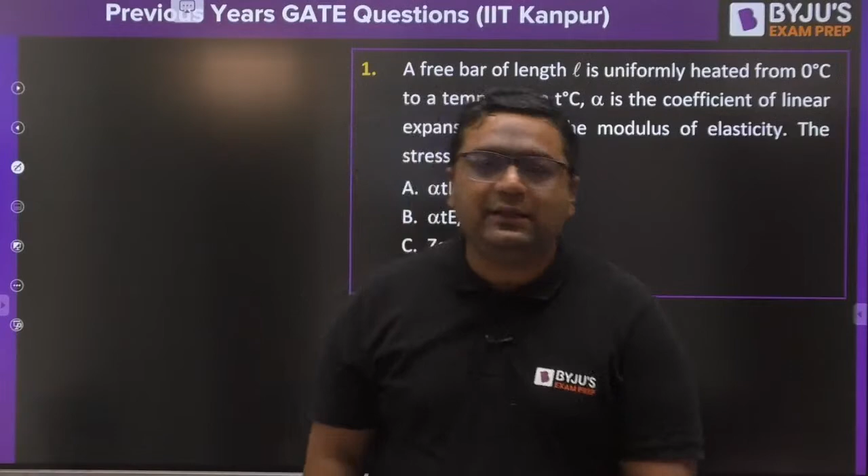This is your first question. I have not mentioned the years, but I have taken all the questions from those 5 years from engineering mechanics and strength of material. So guys, let us see the question. This year IIT Kanpur is going to conduct the GATE examination, so that's why we have taken those years' questions. So guys, this is the first question.

A free bar of length L is uniformly heated from 0 degrees Celsius to a temperature T degrees Celsius. Alpha is the coefficient of linear expansion, E is the Young's modulus of elasticity. The stress in the bar is? You need to answer this question.

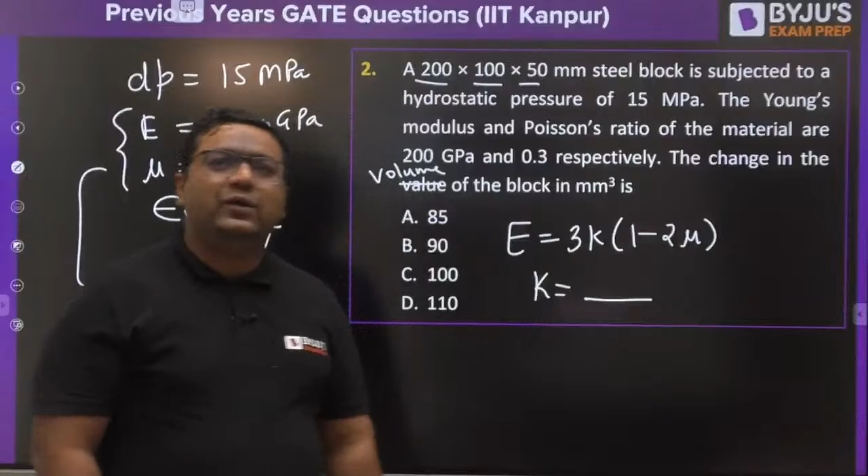Very good, guys. So I feel many students have given the answer. Sai Krishna is also saying B. And yes, B is the correct answer.

Can you tell me what would be the value of K using this relation? Very good, Sushil. Can you tell me what is the value of K? Because E is 200, which equals 3 times of K into 1 minus 0.6. What are you getting as K?

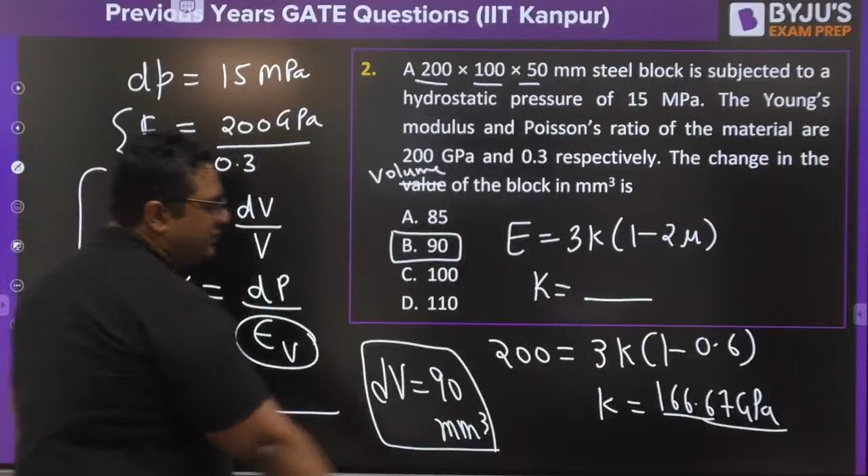Then finding out this K, you will put it here and get the volumetric strain. Then you will get the change of volume dV as 90 mm cube. Very good, guys. Malesh, wonderful dear. So Sagnik has given the value of K as 166.67, and yes, it is correct. This would be coming in GPa. Because this is in GPa, so that would also be in GPa. Wonderful, let us move further, guys.

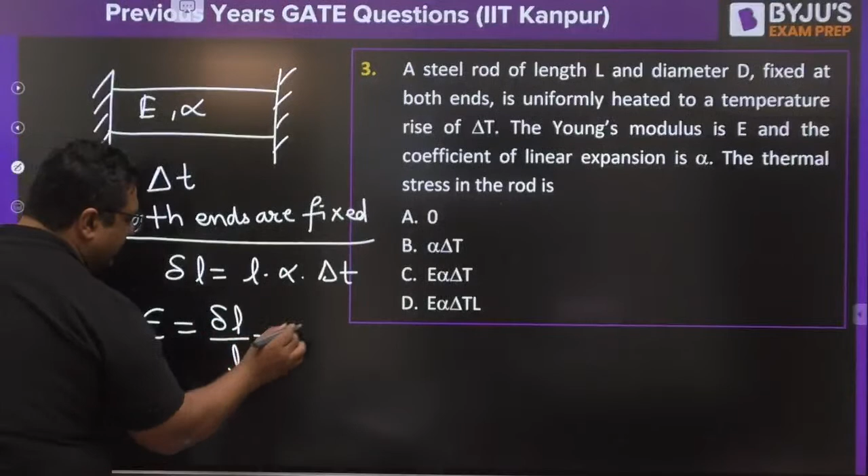Sagnik has said C, Teju has said C. Yes, so guys, this is a both-ends-fixed case. When both ends are fixed, you can see E is Young's modulus, alpha is the coefficient of thermal expansion, and delta T is the change of temperature. So for this case, first of all, delta L is defined as L alpha delta T. Then you can define the strain as delta L by L, which is nothing but alpha delta T. Then we define stress as E times epsilon, that will be E alpha delta T. So the answer is C. Wonderful, guys.

This is the next question, guys, question number 4. This is a stepped steel shaft shown in the figure, subjected to a torque of 10 Newton meter. If the modulus of rigidity is 80 GPa, the strain energy of the shaft is? Very good Mangu, very good Hazik Imam, Sushil, Parth, Malesh.

Kishan, don't worry. For that, I have taken the practice session separately. If you remember, last month I took a complete marathon on SOM and TOM, other than gate questions. You can see the level of those questions, and I feel you found it good also. So guys, don't worry, for those kind of marathons I am going to come now every week.

I was waiting till your subject gets completed. Now you will be getting that level of question also in the marathon. But previous year's gate questions are also required. If you are talking about previous years, questions are very good. Just for 3-4 years they are easier. So sometimes easier, sometimes difficult they have been.

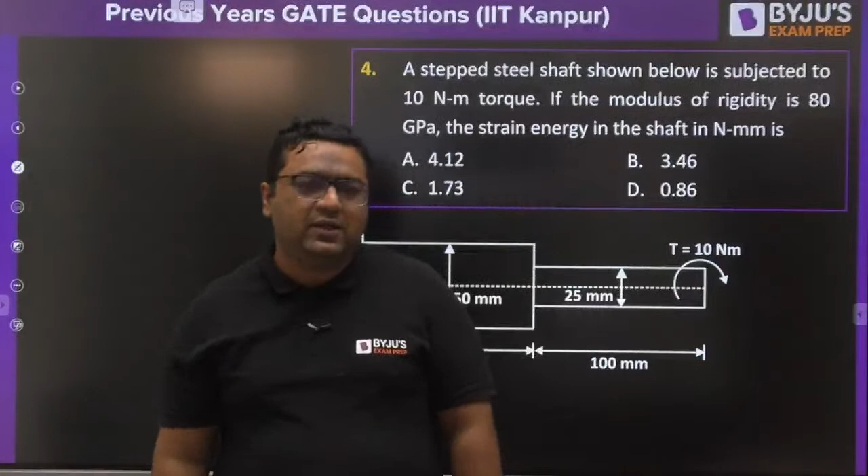In this session only, you will see 8 to 10 very dangerous questions also. But yes, that practice session where I was taking every question as dangerous, that will be coming next week. So we are going alternatively, one week previous years, one week practice session. So be ready for that.

Solve this question, guys. Like this question, they are asking strain energy. You can assume this to be shaft 1 and this to be shaft 2. And you know that strain energy is a scalar quantity, directly added up. So you will be saying U is going to be U1 plus U2.

You also know that U1 will be defined as half into T1 into theta 1. And you know theta 1 is given as T1 L1 by G1 J1. So you can write U1 as T1 square L1 by 2 G1 J1, and U2 as T2 square L2 by 2 G2 J2.

Now my dear, you can see diameters are given. J is defined as J1 is pi by 32 - pi by 32 or 64? Yes, it is 32. So pi by 32 D1 to the power 4, and J2 will be pi by 32 D2 to the power 4. You can see D1 is 50, D2 is 25.

Lengths are given as equal, and as the torque is applied at the free end, using method of section you will find out both T1 and T2 are equal, and they are equal to 10 Newton meter.

Any doubt, please ask, guys. Very good Mangu, but I need the answer. Like Sagnik has said, the answer is C for this. Let us see - okay, very good. What about others? Okay Mangu, very good, you have given the answer also. Very good, wonderful dear.

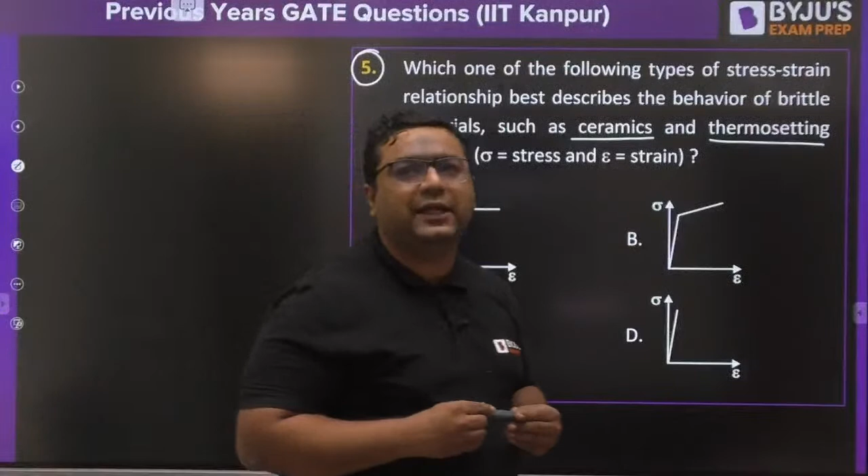So all of you are saying the answer to be D, and that is correct. The reason behind this, guys, is that in this session, whenever you follow a previous year's book, you get a solution, but the solution you get in this session is more authentic, so you'll get the correct explanation for everything.

When we say a material is brittle, it means brittle materials have less or zero plastic strain, because brittle means not ductile. Ductility means plasticity, and you can see this region is plastic, this complete region is plastic, this region is plastic. So only this diagram has no plasticity, which is why D is the correct answer.

Question number 6, a numerical answer type problem. A rod is subjected to a uniaxial load within the linear elastic limit. The change in stress, D sigma, is 200 MPa, the change in strain is 0.001, and Poisson's ratio is 0.3. You need to find the modulus of rigidity. This question is from elastic constants.

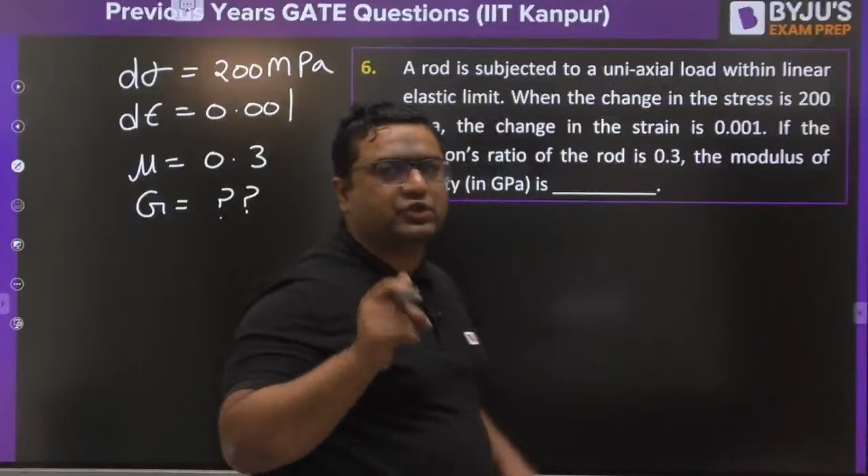This is a pure elastic constant problem. You know that Young's modulus is defined as D sigma by D epsilon, and this relates mu and G through E equals 2G times 1 plus mu. You need to find G, so solve it.

I feel Sagnik has given the answer 76.92. What about others?

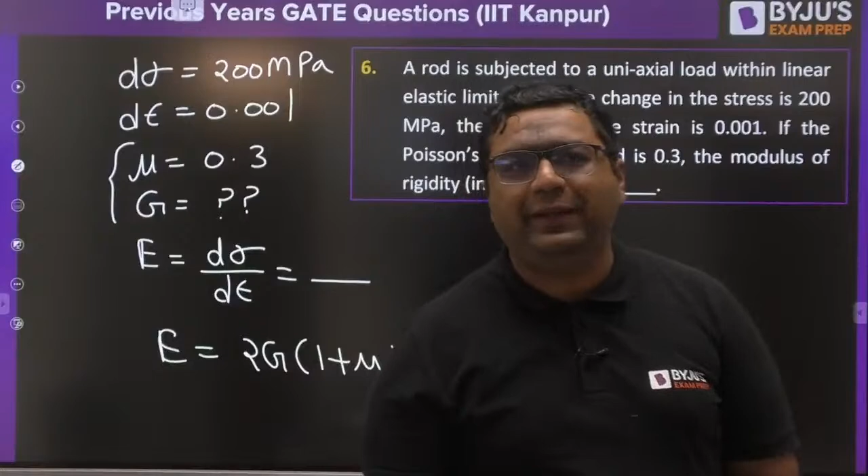It is 200 by 0.001, which comes out to be 200 GPa. So 200 equals 2G times 1 plus 0.3, and you get G to be 76.923. So all of you giving this answer are correct.

Abhishek, good morning dear. Yes guys, wonderful. Teju, very good. Anil, very good. Kishan, very good. Wonderful guys.

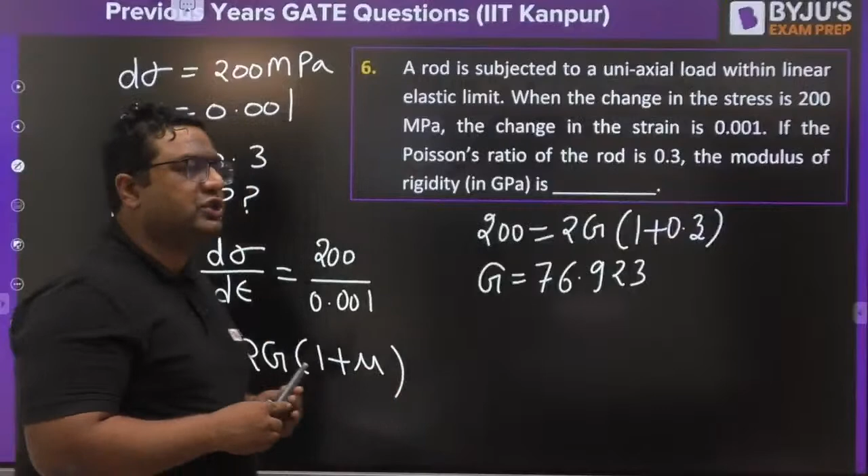So guys, this was question number 6. Now let us move to question number 7, a basic conceptual question for 1 mark. For a simply supported beam on two end supports, is the bending moment maximum at the support, always at midspan, where there is no shear force, or where deflection is maximum? So bending moment is maximum where?

Dear Abhishek, when they give it this way, you must understand that when you have a stress-strain diagram, and you need to take the slope, you can take this relation: sigma 2, sigma 1, epsilon 1, epsilon 2. This is a mathematical slope relation, so don't worry about that - that kind of thing can be given.

This question, many students are giving different answers. When they say there is a simply supported beam, bending moment is maximum where? At the support there is no chance. Some students may say B, some may say C, but it is not always at midspan. You must have seen a case with UVL instead of UDL - in case of UVL, the maximum bending moment is not at midspan, only in case of UDL do you get it there. So if the loading changes, you cannot guarantee maximum bending moment is always at midspan.

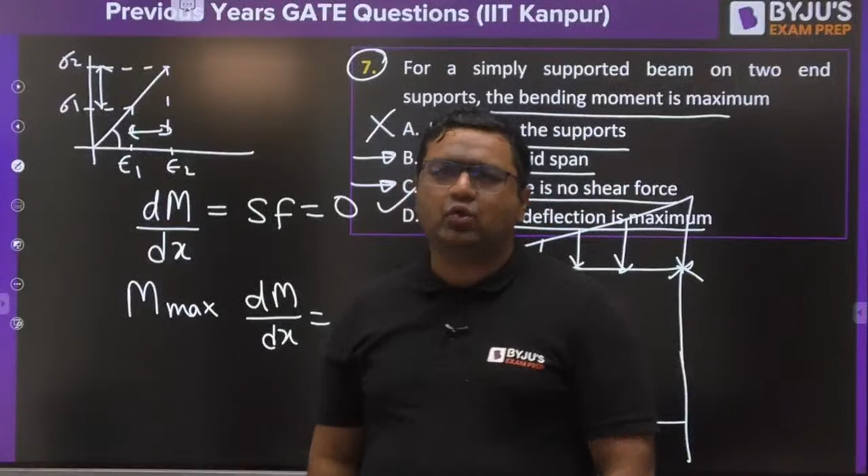Is it clear? Ram Yadav, in all the top 7 IITs, design is at top, thermal is majorly at second number, third is manufacturing. So that is a good idea. I don't know other than this what you are getting, but if you are getting the best option it's fine, though if you are getting IIT Bombay or IIT Chennai, those are better. Let us move to the next.

So guys, here a force is acting, and let me show you the force for this case - a 100 Newton force is acting here.

Yes, you need to answer about the maximum bending moment for this case. So my dear, for this kind of case, first of all, you need to take the effect of this force at the longitudinal axis of the beam.

For that, you will see at this point there is no force acting, so you will apply two equal and opposite forces. This is 100, this is also 100. So this 100 and this 100, they are going to create a couple. So my dear, you will be having a simply supported beam now, on which at center there is a force.

100 Newton into 100 mm is the couple. So this is 100 Newton into 100 mm. Unit you need to take care of.

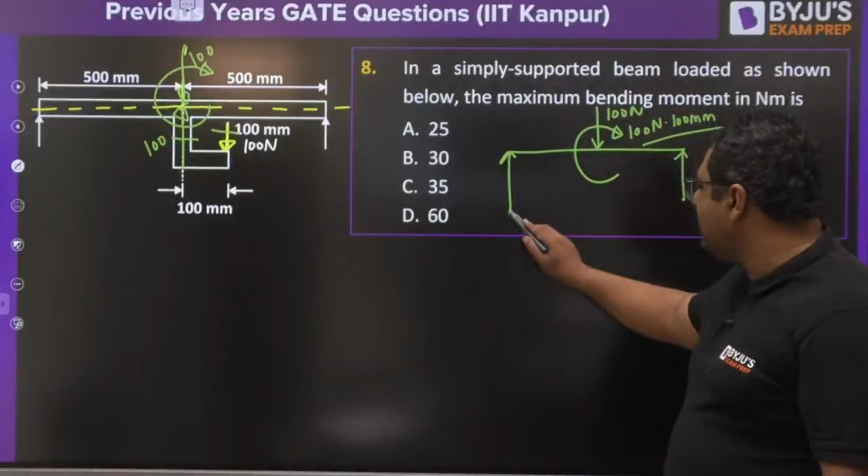And my dear, for this kind of case, you need to answer about the maximum bending moment. So for that case, you must be aware which type of bending moment diagram we are getting for this case. So I am, without taking care of sign convention, giving you an idea. It will be coming something like this.

So you need to find out this value actually. I have given you an idea of how to find out this. So you can do one thing, find out this support reaction and bending moment at this point C.

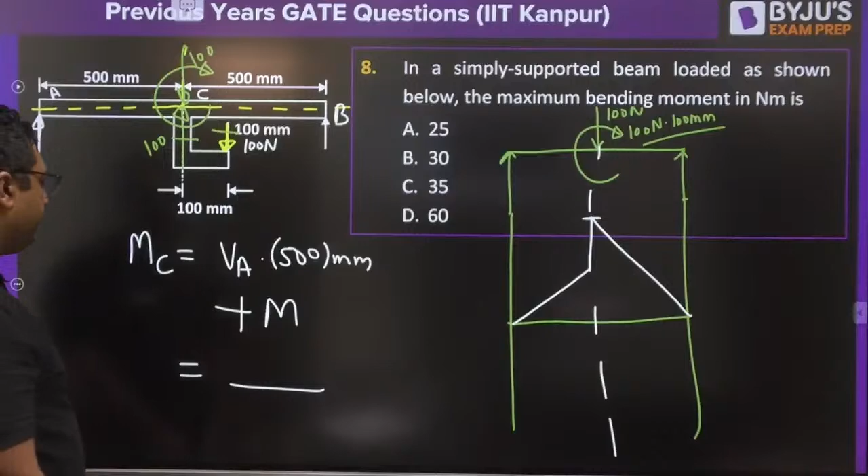If this is A, this is B, you can write it as VA into 500 mm plus this bending moment M. So this is how you can find out, plus M as per the sign convention.

Kishan is saying, okay, Sagnik is saying 8B, 30 is the answer. Abhishek is also saying 30 is the answer. Okay, let me check it.

Very good, very good, guys. So if you find out the support reaction, my dear, it will be coming out to be 40. It will be coming out to be 60. So this is the BMD I have made directly.

We have done this type of question many times in the class. So the way to find out support reaction, VA plus VB is equals to 100. Taking summation moment about A to be 0, then you will be having VB into 1000 mm. This is positive, minus 100 into 100 mm is equals to, okay, this also will be creating.

This is anti-clockwise, this is clockwise, this is again anti-clockwise, plus 100 into 500 mm. Putting it to be 0, you are getting the value of VB. So you will be getting VA also. VA and VB are known to us, my dear.

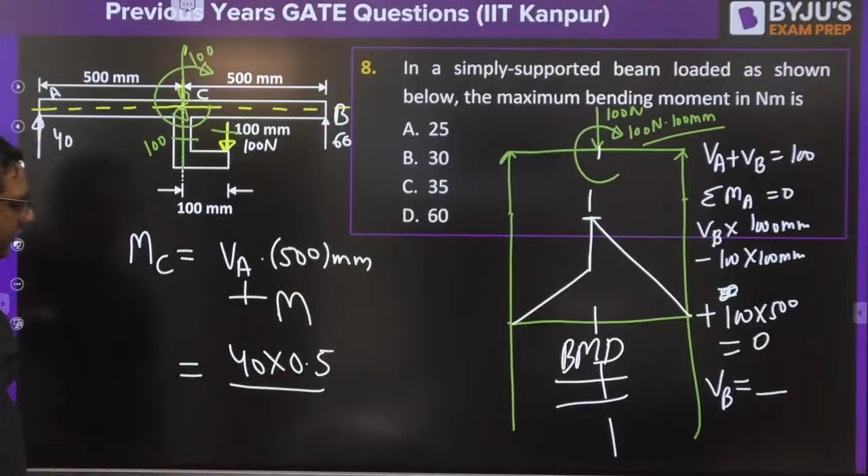After getting VA and VB, 40 into 0.5, because 500 mm means 0.5 meter, then plus or minus. Is this okay? Will this be coming plus 40 or minus 40? Yes, plus this is 100 into 0.1. So this will be coming out to be 30 Newton meter.

Answer will be B for this. Wonderful, guys. Kenil, very good. Sagnik, very good. Abhishek, very good. Anil, Ram, Sushil, Teju, getting it or not?

If any doubt, do ask me. I have given you the way to find out. You will be getting this as 40 Newton, this as 60 Newton. Is it clear for everyone? Yes, guys. So I am majorly giving you how to find out the solution, as there is no need to make a BMD. I have made it just for the reason so that you can understand.

Like if you see my support reaction at VB is 60. If you want to find out this bending moment directly also, you can find out. This distance is how much? This is 0.5. So 60 into 0.5 is also 30. So you will be getting this as 30. Actually, this is how the jump is going to occur.

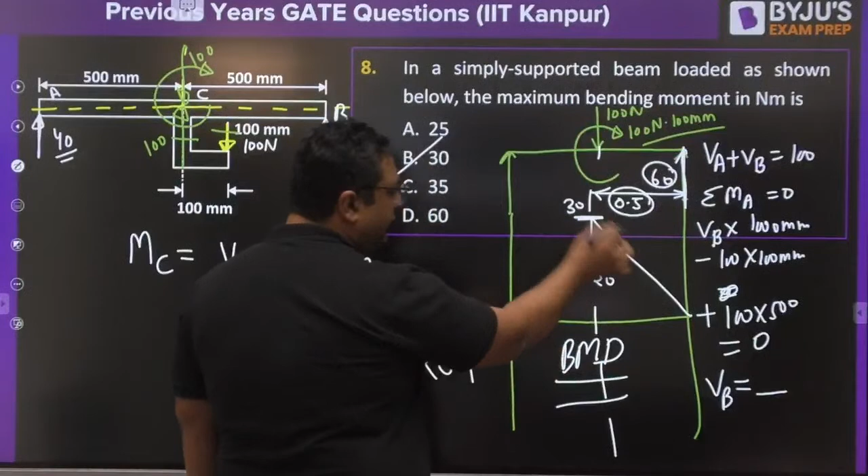I could make this BMD without any SFD also. I told you when you will be practicing, you will also be able to make it. But for this question, there is no need to make SFD BMD. I have made it just for the sake of those students who have studied like that, they can directly solve it with this diagram also. Otherwise, this is the general way to solve what I have done actually.

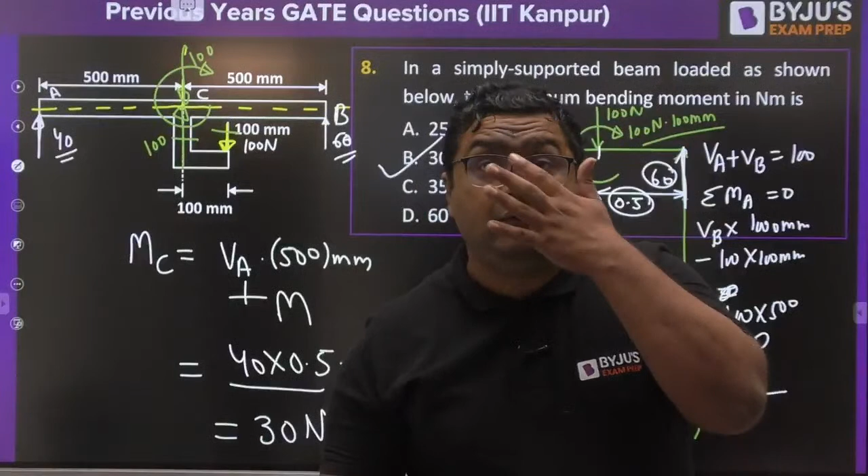Okay, so if you want to know how I have plotted, I am telling you. VA will be coming out to be 40 Newton, VB will be coming out to be 60 Newton. Here there is a force of 100 Newton and there is a moment of 100 into 0.1, which means 10 Newton meter. This is what is given to us.

Now if you are going to make SFD for this, you will be going for the sign convention. This is one section, this is another section. To the left hand side, I am showing the sign convention also.

Sign convention for shear force are this: positive, negative, positive, this negative. Those who are saying, sir, how you have plotted this BMD, I have used the empirical relation method, the slope method.

So you must be aware that whenever we are going to make the shear force diagram, to the left hand side of the section there is a jump of 40 Newton. So we will be having a jump of 40 Newton, it is positive. Then A to C there is no other load.

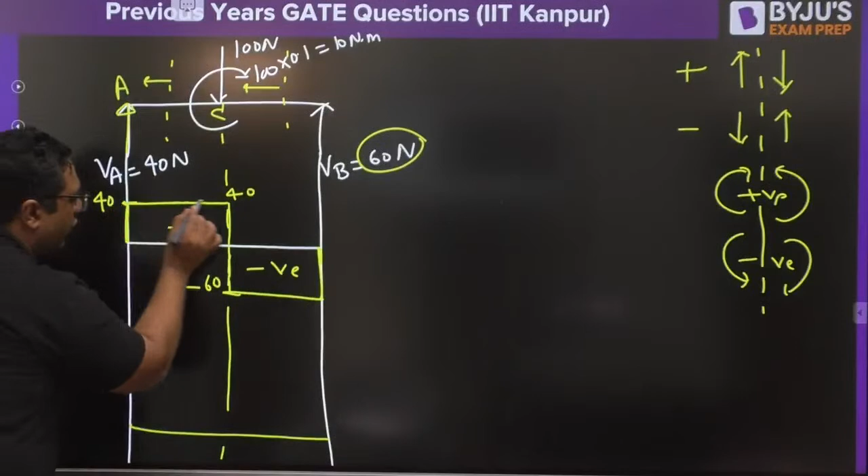Now we are going to make the BMD. If SFD is a horizontal line, BMD is going to be an inclined line, that we know by the slope method. Those who don't know slope method and want to study that, please write in the comment section. Then I will be making a session specially on SFD BMD, and I will teach you this shortcut method to make SFDs and BMD.

So if this is a horizontal line, we are going to get an inclined line. You very well know that the area of SFD is giving us BMD. So we can write bending moment at C minus bending moment at A is equals to the area of shear force diagram. So this is 40 into 500 mm.

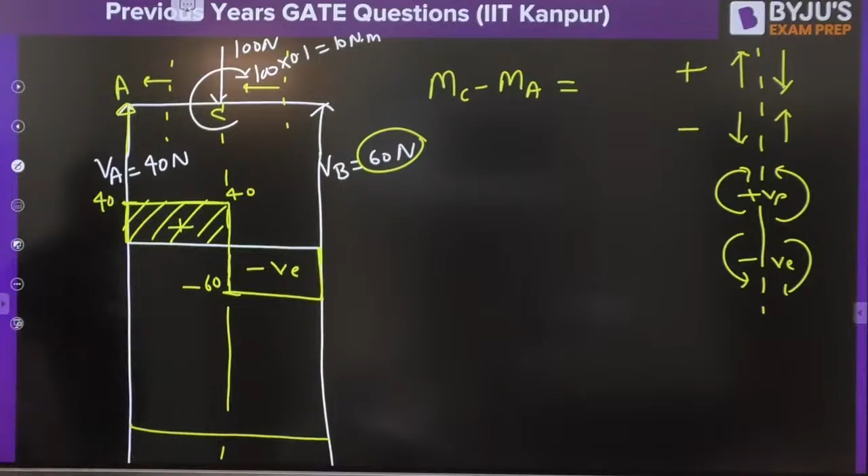40 into 500 mm. You know that as this is a roller or hinge support, so MA is going to be 0 at the support. MC will be coming out to be 20. And you know, if this is a horizontal line, bending moment is going to be an inclined line. So I will be making this as 20, joining this 0 to 20.

In the same way you can do for this case. You can write this point was B. So you can write MB minus MC is equals to this area, and this area is minus 60 into 0.5. And this will give us MB, which is already 0, because at support bending moment is 0 for roller support as well as for hinge support.

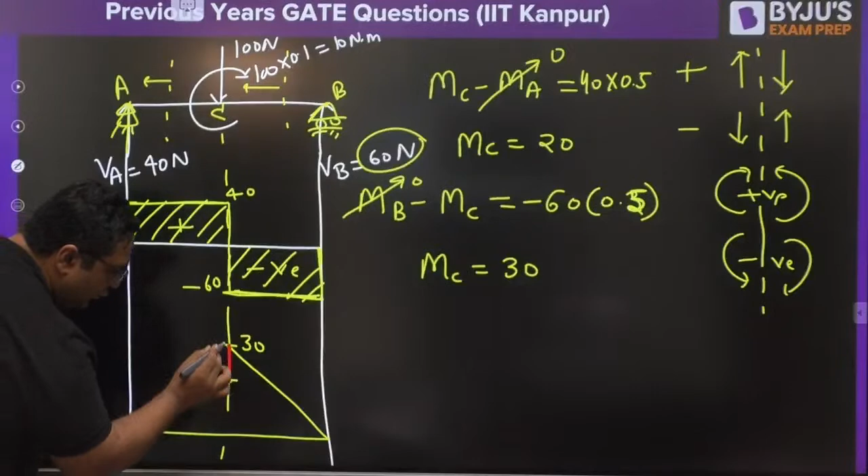So you will be getting MC to be 30. And you know it is a horizontal line, one degree more will be an inclined line. So the diagram will be coming like this. Now at one point, if we are getting these two values, they must be joined like this. So this is going to be the bending moment diagram, and the maximum value is 30.

So those who are aware of this slope method, only those students go for this. Other students go like this: first of all, support reaction calculation, we have gone through summation vertical 0, then summation moment 0. You need to go like this. Those who are knowing the slope method, they can very easily plot SFD BMD and get the answer.

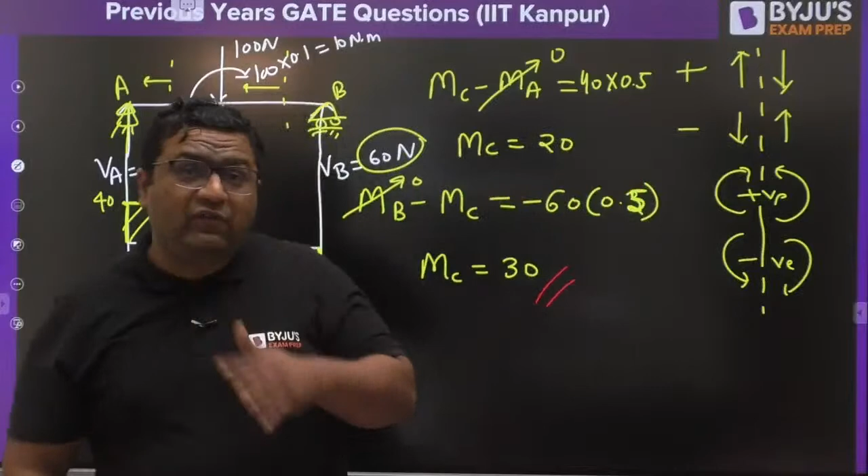Question number 9, this is from compound beam now. This question is from compound beam. Compound beam, the favorite topic of GATE, compound beam.

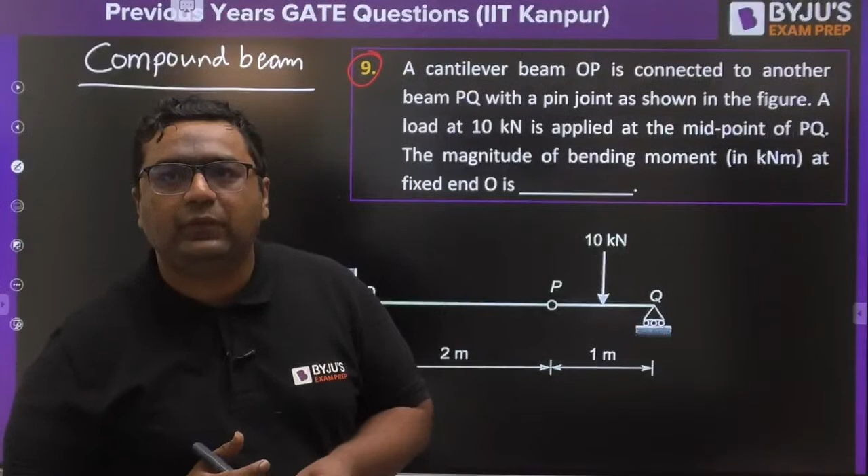Sagnik is saying the answer will be 10 kilonewton meter. Okay, we will see. Wonderful. Ganpati Babu, very good. Kishan, very good. Nagaraju, very good. So you can see how easily you are solving the compound beam problem.

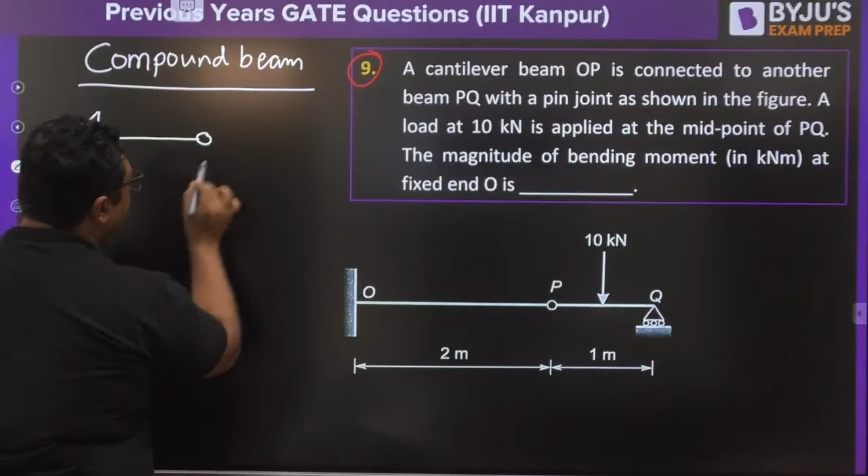Wonderful, guys. So my dear, if you see this propped cantilever beam, this compound beam, there is a procedure to solve this. Okay, this is Q, this is P, this is O. And if we have this force as 10 kilonewton.

So to solve this type of problem, we need to divide them in two parts, like this. And we are going to put a support reaction here as VP, and the same force here as VP, because there is no force at P point. This is an internal hinge, so we are providing VP here so that the net here is also 0.

Then this distance is 2 meter and this distance is 1 meter. So here the load W is acting as 10 kilonewton, and by symmetry the support reaction VP is going to be 5 and support reaction VQ is also going to be 5. So VP is 5, and 5 into 2 will be the support moment reaction MO, which will be 10 kilonewton meter.

Sir, we have to separate, then there will be 2 reactions extra. Very good, Kenil. Very good.

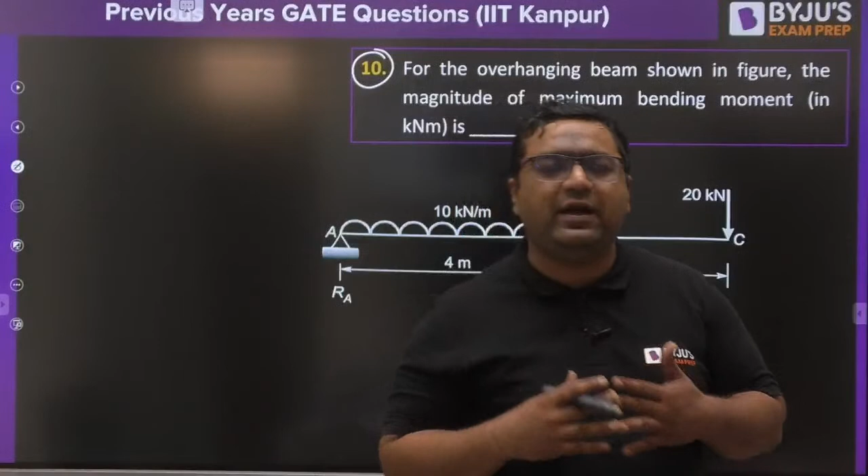So you need to find out first of all the support reaction, then you will make SFD and then find out the bending moment. So here you need to plot SFDs and BMDs both. Very good, guys.

So guys, this is going to be a support reaction RA, and this is going to be a support reaction RB. First of all, you need to find out the support reaction, then we will talk about SFDs and BMDs. You can see this is 4 meters. I am helping you, as there is no shortcut applicable in an overhanging beam. RA plus RB will be 60 kilonewton.

Then you will be taking summation moment at A or B to be 0. This was summation vertical equals 0. Now I will go for summation moment about A to be 0. You know this HA and RA will be passing from A. You can see this UDL, and this entire UDL is acting at its centroid.

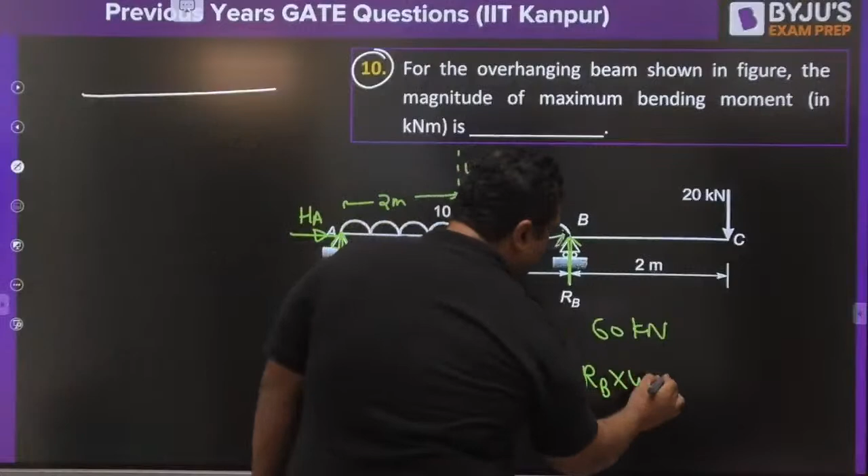So 40 kilonewton is acting at 2 meter distance. This is creating clockwise, so plus 40 into 2. RB is creating anti-clockwise, minus RB into 4. Then this 20 will be creating clockwise, plus 20 into 6. You need to find out RB.

Try to solve and give the answer, guys. You will get this 40 into 2 equals 80, plus 120, so RB will be coming out to be 50, and RA will be coming out to be 10 kilonewton. So 10 and 50.

Now we are going for SFDs and BMDs. Let us make it on the next slide. This is 10, 4 meter is UDL, this is 50 kilonewton, 10 kilonewton per meter. After 2 meter, there is 20 kilonewton, at 2 meter and 4 meter. We need to go for SFDs and BMDs now. Okay guys, very good, Sagnik.

Very good. So when you will be going for SFDs and BMDs, first of all we need the sign convention. This is going to be positive shear force, this is going to be negative shear force, this is going to be positive bending moment, and this is going to be negative bending moment.

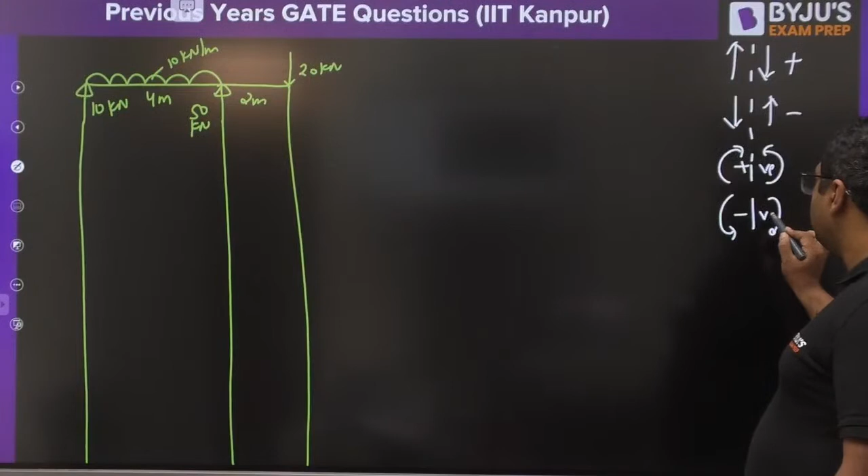Okay guys, so now we need to make the SFD. You know that from A to B there is one type of loading, from B to C there is another. I told you when the type of loading changes, or another support comes, you need to change the section. So we will be having section 1-1 like this and section 2-2 like this.

Okay guys, if you want, I can go by writing the equation also, that will be more favorable for you maybe. So V1-1, you can write it as VA. It is going to be plus because to the left hand side, upward is positive. Then you will write minus W into X. You can see X to the power 1 means a straight line equation. This is 10 minus 10X. So putting this to be 0, you will get X equals 1 meter, and this equation is valid from A to B. Putting X equals 0, you get VA as 10 kilonewton. Putting X equals 4, you get VB as 10 minus 40 equals minus 30 kilonewton.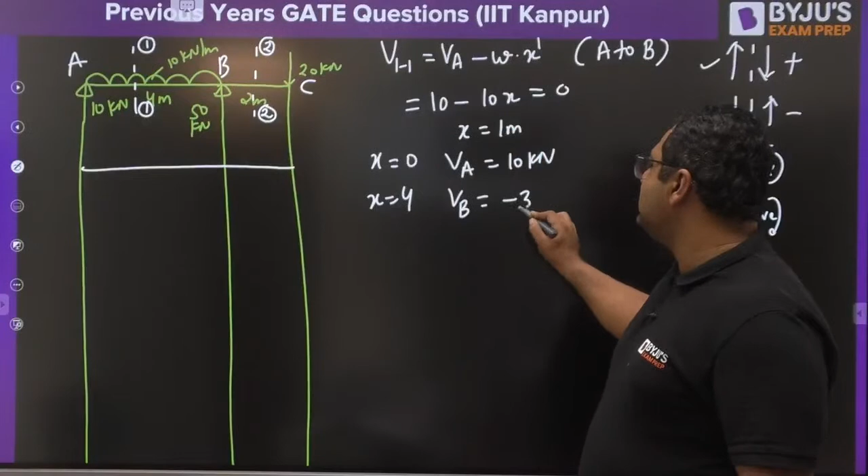So my dear, if you want to plot the SFD, I could make it like that also. There will be a jump of this support reaction. Then, as this is a horizontal line, UDL is considered as a horizontal line, so SFD will be an inclined line, going like this. You have 2 points, this value is 10 and this value is minus 30. There is a jump of 50 kilonewton again, so minus 30 to 50 will be this 20. Go up to 20, total is 50.

From B to C there is no other load, so you will go like that. And because of this 20, you will end at 0. This calculation was not required for me, but I have done it for you so that you guys can understand how the things are coming. So this is the SFD. I wanted to find out this distance, that's why we have done it in this way.

Now, my dear, when you are going to make the bending moment diagram, you must be aware that where shear force changes its sign, bending moment is going to be maximum. So one point is B where shear force is changing its sign, the other point is D. So either at this or at this point, we will get maximum bending moment.

You must be aware that here shear force is horizontal, so bending moment will be inclined. Here shear force is inclined, so bending moment will be a parabola. So if you want to find out how it will come, then bending moment at C minus bending moment at B is the area of SFD between these 2 points. This way I have taught many times on YouTube.

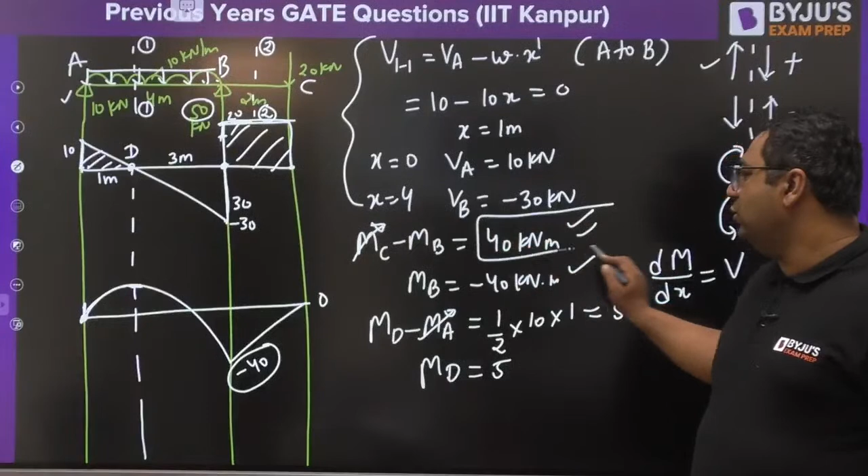Are you getting it? How wonderfully we are plotting this bending moment diagram and SFD? Guys, please tell me, are you comfortable with the way I am plotting it? Do you know this way or not? If not, I can go in a more explanatory way. I am going casually because I feel everybody knows how we are doing this, since you all have seen it many times.

So the answer will be 40 when we are going magnitude wise. Okay, next question.

This is a propped cantilever, a propped cantilever beam. So those who were saying the questions are easy, now good questions are also coming, yes or no? Very good, guys, very good. So solve this question now. Both diagrams are given, but I feel this diagram is enough for us.

I am giving you the name for this: A, B. They are saying this reaction is R1, this reaction is R2, and this is M. So guys, Q is the load intensity given to us.

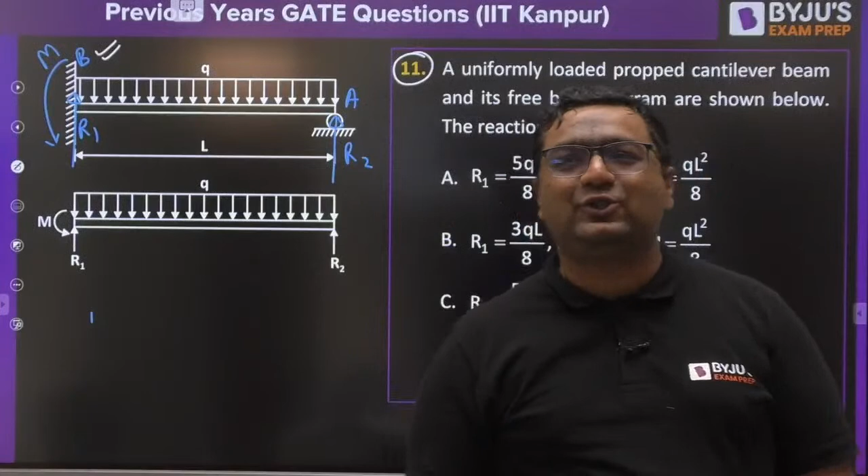Let us see how many of you give the right answer for this. Pavan is saying the answer is A. Sagnik had given C, then deleted it. Yes. Teju is also saying A is the answer. Very good, Sagnik and Kenil. Wonderful, guys, wonderful. Really wonderful. You guys are going really awesome.

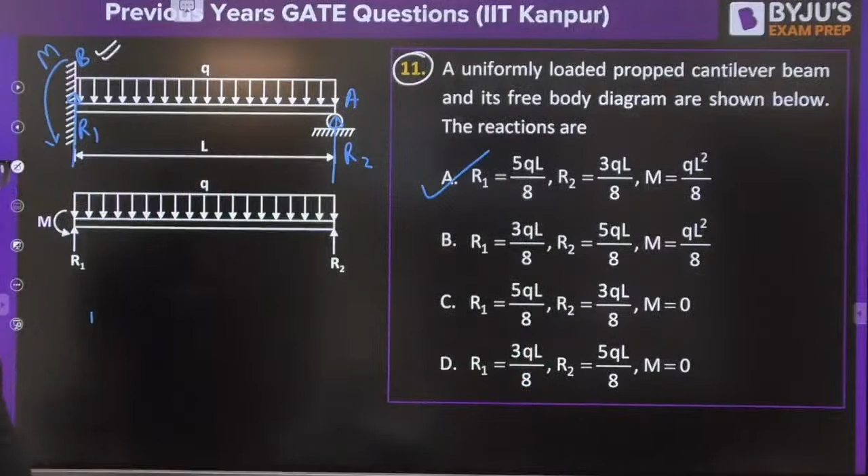Answer is A only for this. So, my dear, you know this is a case of propped cantilever beam. Here, if you see the number of support reactions, if I show you generally, we are having this as a UDL.

So there is a support reaction, there is a support reaction. Let us say this is VB, this is HB. There is HA, there is VA, there is MA. So if you see all these support reactions, we will say HB is 0, HA is 0.

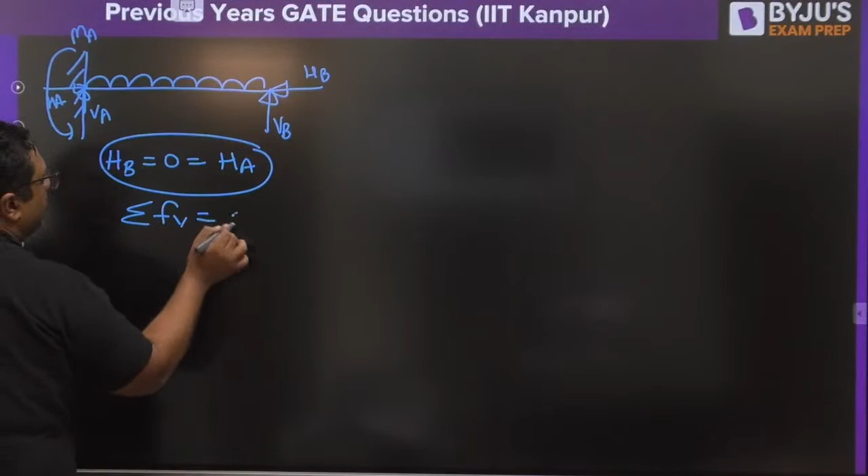Because there is no horizontal force. Then we will go for summation of vertical forces to be 0, and we will say VA plus VB equals Q into L. You can see this is one equation. Then we will go for summation of moment about B to be 0.

You can see this MA is anti-clockwise, so minus MA. Then, my dear, this VA is creating clockwise, so plus VA into L. Then this total load we will assume acting at the CG or centroid, Q into L, acting at a distance of L by 2. So we will write it that way - this is creating anti-clockwise moment, so minus QL into L by 2.

Then, my dear, VB and HB are passing from the same point, so moment will be 0 because of that. So this is equation number 2. My dear, equations are 2, unknowns are 3 - VA, VB and MA. So 2 equations, 3 unknowns, we cannot solve it.

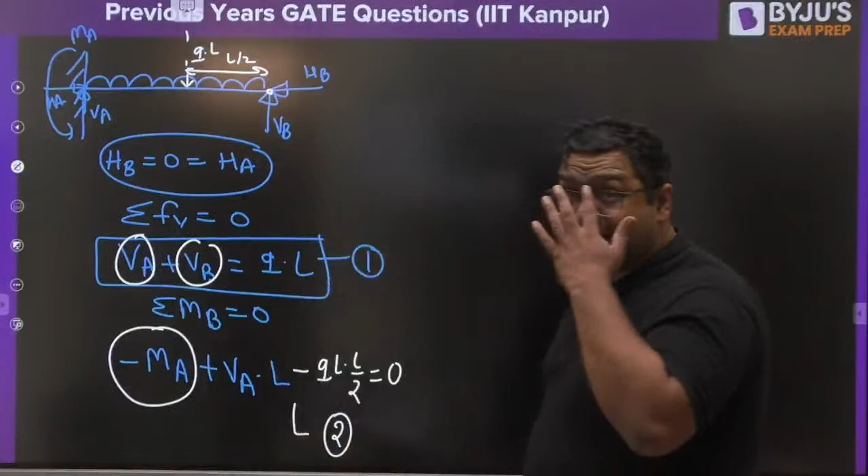If that is the case, we need an extra equation. We know at this point support is present, so at point B, deflection will be 0. You know at point B, deflection will be coming because of 2 reasons. One is because of this UDL.

You will be having YB as minus WL4 upon 8EI. W is given as Q, so minus QL4 upon 8EI. And my dear, the second is coming because of this force VB, so this is going to give positive deflection, this is going to give negative deflection. So this will be YB as VB L cube upon 3EI.

You very well know that these two are going to be 0, because Y at B due to Q plus Y at B due to VB is going to be 0. I will add them: minus QL4 upon 8EI plus VB L cube upon 3EI. Putting it equal to 0, you will get VB as 3QL upon 8. So when you get the VB value, my dear, you know VB is nothing but R2.

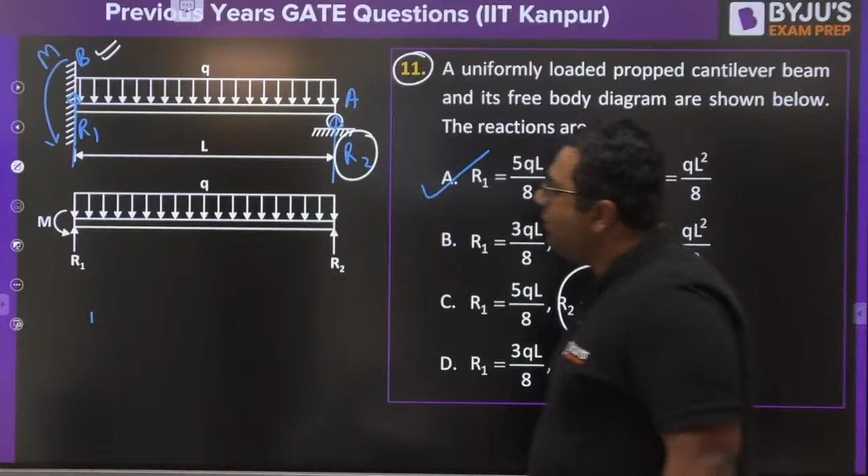So R2 is 3QL by 8 here also, here also. So either A or C will be the answer. You know bending moment at A cannot be 0. So because of that, C is wrong and A is correct. Okay, so no need to calculate further.

I wanted to tell you this thing. When you have this type of option, no need to go for complete calculations. Only one small calculation can help you in solving the complete question.

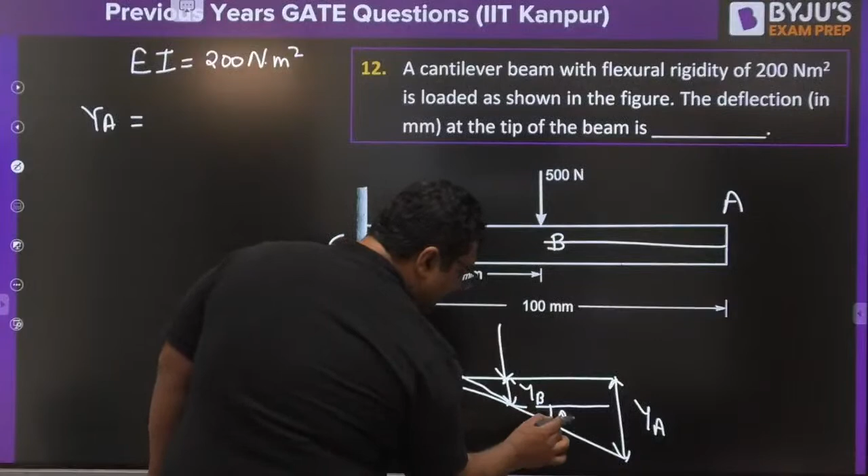Because there is no load from A to B, it will remain a straight line. This angle is also theta B. So you can write YA as YB plus theta B into AB. Are yes or no?

Wonderful Pawan, wonderful dear, बहुत ही बढ़िया शानदार. अभिषेक, कैनिल, सागनिक, तेजू, किशन, Anil, Nagaraju, Parth.

Wonderful guys, so my dear, YB, theta B, AB. You know my dear, if you consider this as L, this as also L, then I can use the formula theta B as PL square upon 2EI, YB as PL cube upon 3EI.

Here P is 500 Newton. Okay, L is 50 mm. Solve it guys, solve it.

Tanu, there are no options for this question. Okay, 1 by 4, Kenil have given the answer 1 by 4, means you want to say 0.25. Okay, what about others? What about others? I am waiting for the answer. Yes, Sagnik.

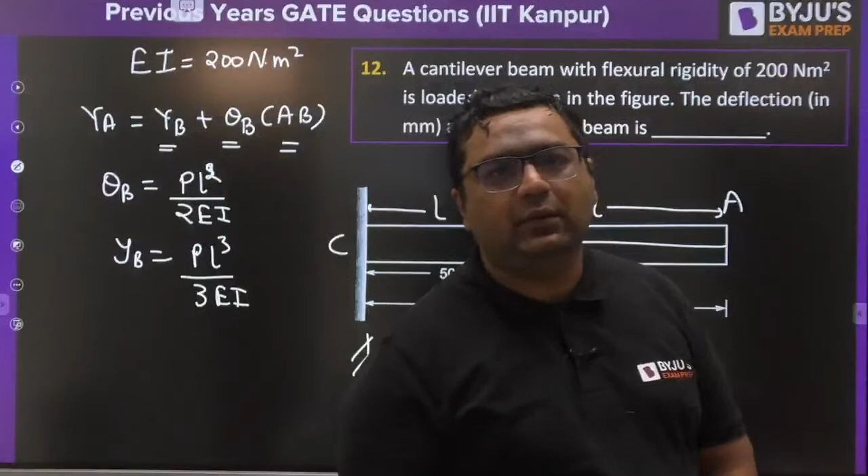So, after solving, you will be getting deflection at A as 0.26042. Okay, guys, this will be the answer. Kishan, you are making some mistake. Answer will be 0.26042 mm, this will be the answer.

The length is 50 mm here. So you need to put length here, load here, and EI is Newton meter square. So when you will take care that load is P, this is 50 mm. So 50 into 10 power minus 3 ka square divided by 2 into 200. Okay, this is how you will be doing.

Very good, Sagnik. Tanu. Question number 13, my dear. This is again from deflection, and here we will be going for moment area method because they are asking deflection at Q. So I am helping you slightly for this. Those who don't know about BMD of this case, I am showing you them.

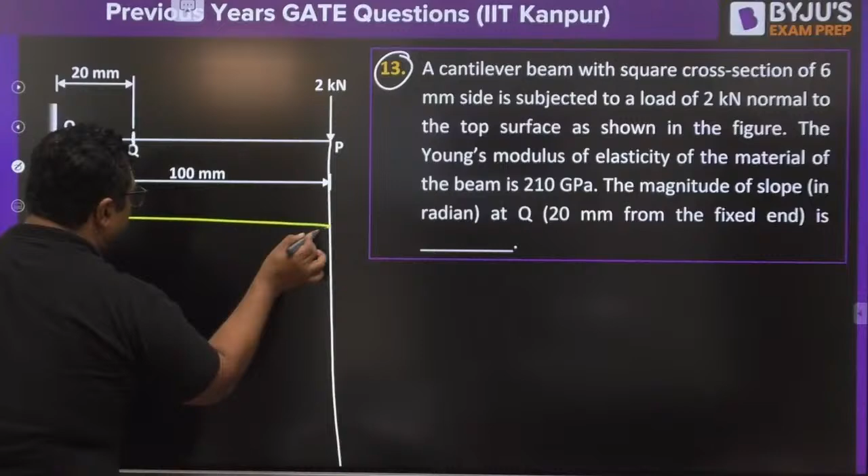This kind of bending moment diagram will be coming. And this value will be PL. You need to find out deflection here. Let us say this value is some X.

Or let us take some other K. Okay, so my dear, this is given that this is 100 and this is 20. You need to find out deflection for this case. You will write deflection or slope.

Actually, you need to find out slope. So you will write theta at Q minus theta at O is equals to 1 upon EI, area of BMD between Q and O. Means you need to consider this area, one rectangle and other triangle.

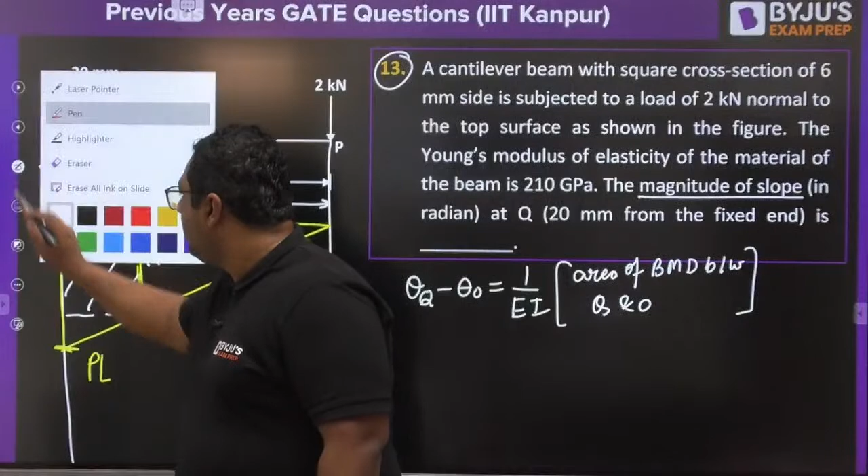For that you need to know this value, and for this value you need to go for angle similarity of two triangles. One triangle is this, another triangle is this. You can write PL by 100, K by 80. You will find out the value of K.

And after getting K, this is first area, this is second area. You will write 1 upon EI, A1 plus A2. So you will be finding out theta Q like this.

Sir, most of questions were from SFD BMD part, slope and deflection part. No, Kenil, before these 4 questions are from SFD BMD part. Before that we have seen other questions also, and after that also some questions will be coming from Mohr circle and all.

Till now we have solved only 13 questions. It depends on how questions come - one question is coming every year from SFD, BMD and deflection part, similarly one question every year from simple stress strain plus thermal stress part. We have seen 5-6 questions of that. Then you have principal stresses and column part, so 4 to 5 questions come every year, one from these 2 to 3 chapters. In previous year's questions, I have taken first simple stress strain, second chapter as SFD, BMD and deflection, so you are getting these questions right now.

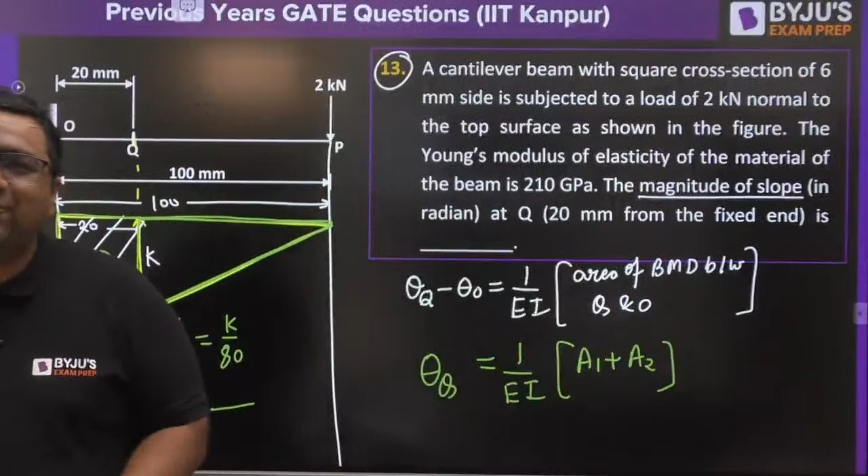Sagnik is saying 0.1587, Tanu is saying 0.1587, and guys, you are correct. The answer will be 0.1587. These are more calculative type, but I have given you how to find them out. Load is given to us, length is given to us, we have just used them. Use them, put the values and get the answer. So the answer for this is 0.1587.

Is it clear, guys? Okay.

Now, this question is the whole thing. This question is from mechanics, that we will discuss later on.

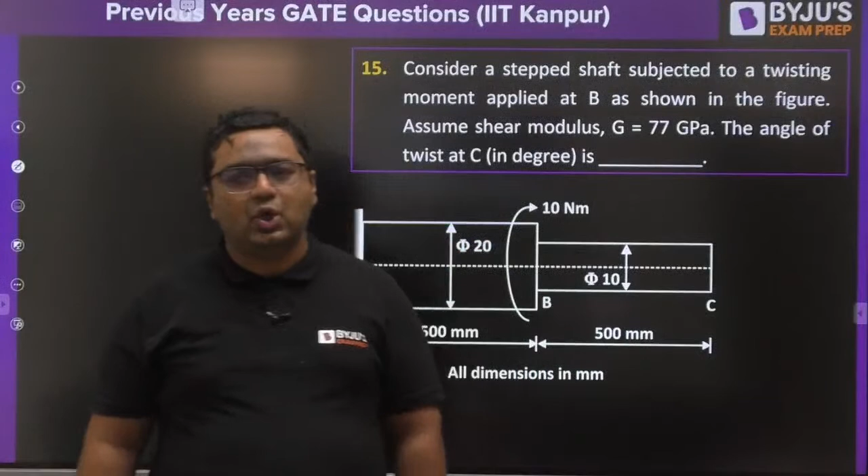Now torsion is coming. Sometimes the weightage is going to increase or decrease, there is no fixed rule. If you see at the time of 2019, 17, 18, there 13 to 14 marks of SOM have also been asked. So we cannot say that it is going to be less always or more always. You can take an average of 8 marks - sometimes it will be 4 marks, sometimes it will go till 12 marks. So you can hope for 8 marks.

Consider a stepped shaft subjected to a twisting moment applied at B, and they are asking for the angle of twist at C. You need to answer the angle of twist at C. This is shaft 1, this is shaft 2. Just solve it, guys, you need to find out theta at C.

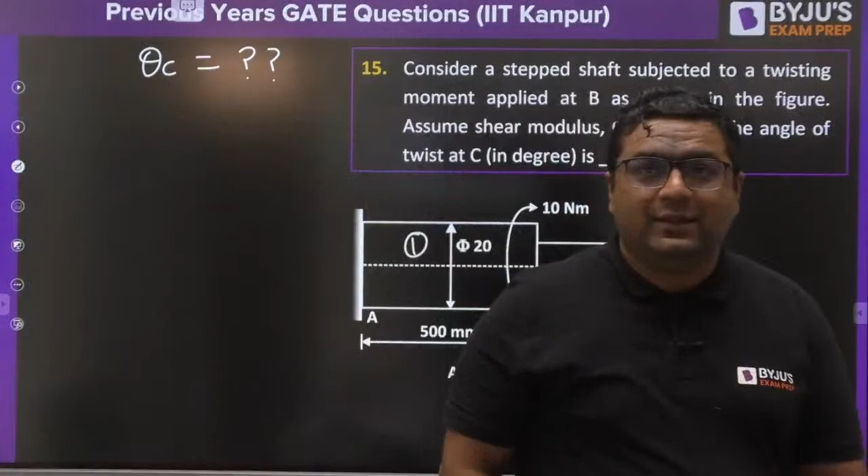Questions are there from every part. Very good, guys, someone has given the answer also.

Look carefully - they have asked for the answer in degrees, that is where the trick is. You don't have options, so this is a numerical answer type question. Many students would make a mistake - they will find theta in radians and not convert it into degrees. So do convert it into degrees also. You can see there is no torque in the BC part, so theta C with respect to B is going to be 0, meaning theta at B will be equal to theta at C. And you know theta at B can be written as T1 L1 by G1 J1. Put the value, get the answer, you will get theta B value, then convert it into degrees using 180 by pi. Solve it, guys.

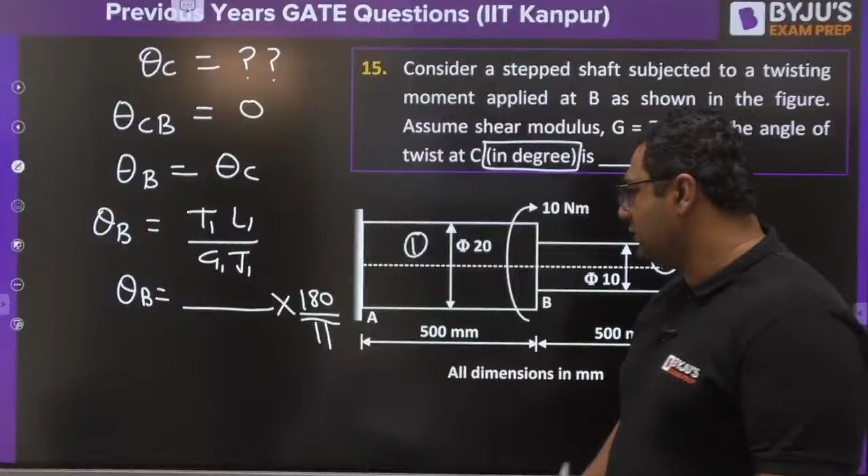Tanu has given the answer, Kenil has given the answer, very good Sagnik has given the answer. The answer is 0.237. Is it clear, guys? Wonderful.

Let us see the next question, once again from torsion. Now Kenil will say all the questions are coming from torsion - it is not like that. I am taking 5 years of questions in front of you, so for the same topic there will obviously be 3 to 4 questions at least.

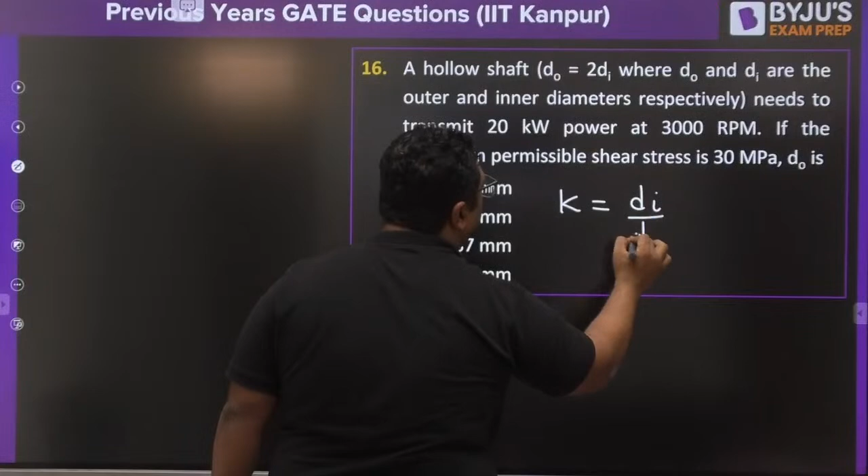A hollow shaft means they have given K defined as di by d naught, it is 1 by 2, and they are saying power is 20 kilowatt. Power is 2 pi NT by 60, find out torque from this. Then you know tau is T by ZP, and they are saying permissible less than or equal to tau permissible. You will get the value of D naught.

Very good. Tanu, Kenil, Sagnik. Yes, Teju, where are you? Teju, where are you?

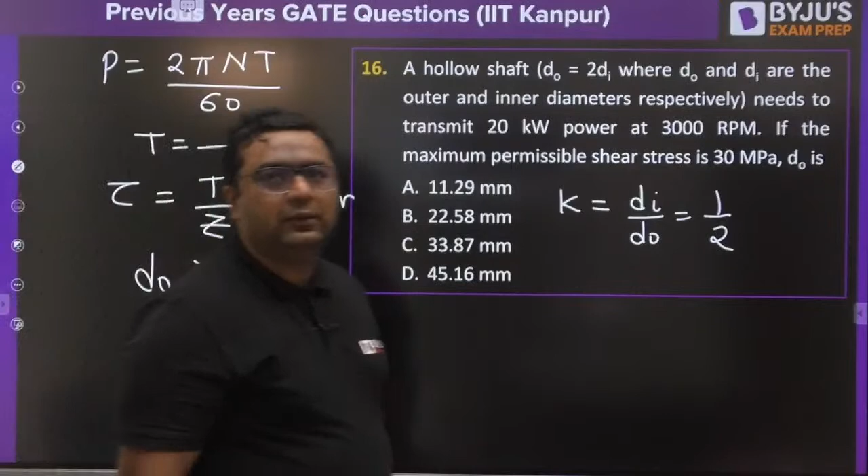Yes, so you know what is ZP actually? ZP is pi by 32, D naught 4, 1 minus K4. This is going to be D naught by 2. This is ZP.

Very good. Sagnik, AA, Tanu, your answers are correct. The answer will be B. It is going to be 22.58 mm. Very good guys, wonderful, बहुत ही शानदार.

Question number 17, once again from torsion. So dear, you can see for mechanical, torsion is a very important topic. Out of 5 years, this is the 4th question. I already told you that simple stress strain, strain energy part plus thermal is 1 question, SFD, BMD, deflection is 1 question, and principal stresses, thin cylinder and spheres, theories of failure is 1 question.

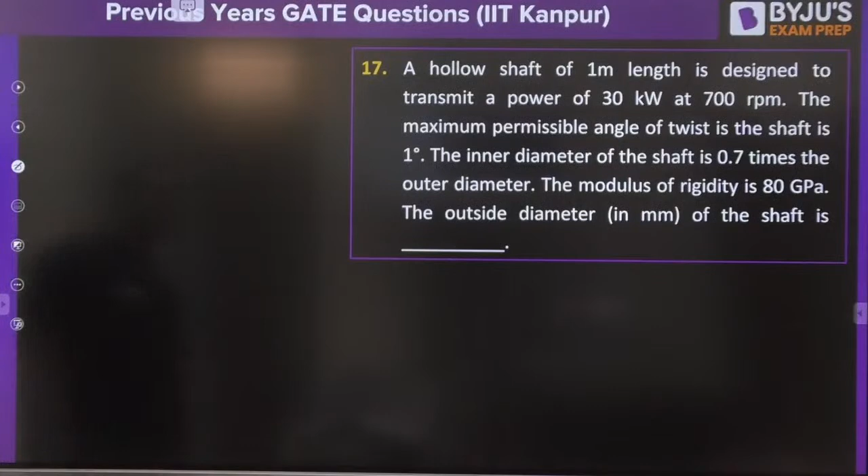So a hollow shaft of 1 meter length is designed to transmit a power of 30 kilowatt and 700 RPM. The maximum permissible angle of twist is given. The inner dia of the shaft is 0.7 times. The modulus of rigidity is 80 GPa. You need to find out the outside diameter.

Similar question you can say guys, very much similar. Previously they have given in the previous question that maximum permissible stress is this one, this time they are saying permissible angle is this one. So you need to talk once again in the same way. Power is 2 pi NT by 60, this will give you the value of torque. Then you will write theta as TL by GJ less than equals to theta permissible, and my dear, this will give you the D naught value. Solve it.

Very good, Kenil. After this question, we have a question from principal stresses, thin cylinder. So questions from all the areas, whatever they have been asked in those 5-6 years, we are covering all of them, okay guys.

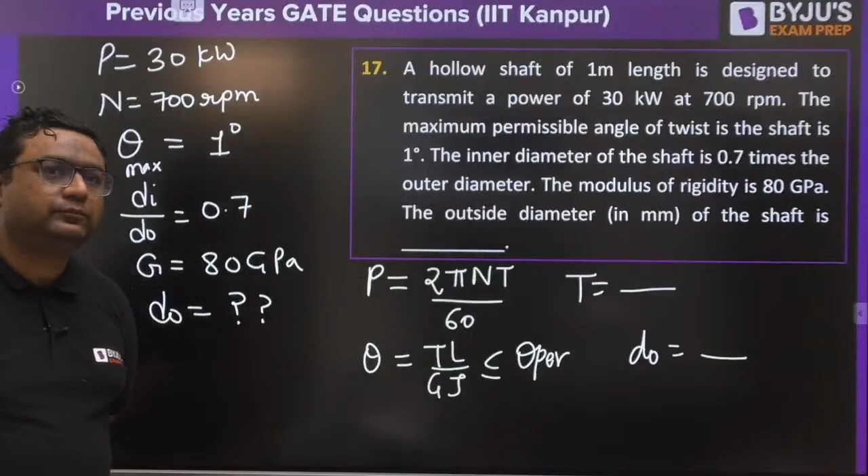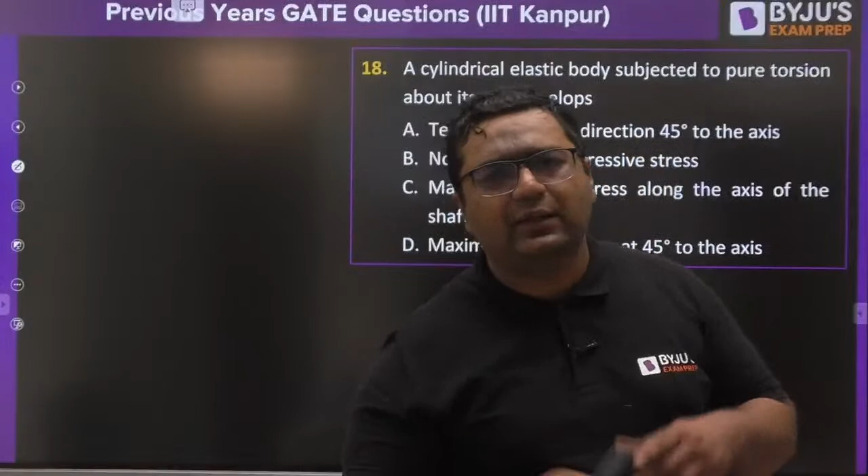Now we are having questions from principal stresses, that is transformation you say for civil people. A cylindrical elastic body subjected to pure torsion.

This was T. Is it fine? Yes guys, Vinay, very good, very good Vinay. Okay, Sagnik is saying D is the answer for this.

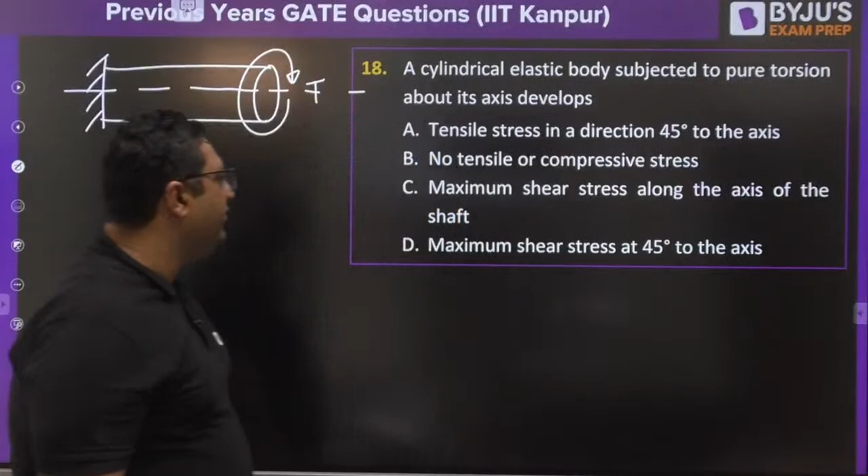A cylindrical elastic body subjected to pure torsion about its axis develops tensile stress in a direction of 45 degree, no tensile or compressive stress, maximum shear stress along the axis of the shaft, maximum shear stress at 45 degree. So my dear, when we are having pure torsion, the state of stress is like this, everybody is aware of that. And in this case we have principal planes at these locations, so these are obviously at 45 degree from X face. So my dear, yes, the answer is going to be A. Is it clear? Yes.

Yes, the answer is A for the previous question. Very good, Sajan, Rosh, Vinay - well done.

Now we are having question number 19. An elastic body is subjected to a tensile stress X in a particular direction and a compressive stress Y in its perpendicular direction. One is tensile, other is compressive. X and Y are unequal in magnitude. On the plane of maximum shear in the body, what will there be? This question you can solve very easily using Mohr circle. This is X, this is Y, and they are saying X is not equal to Y. This is a really very good question, guys.

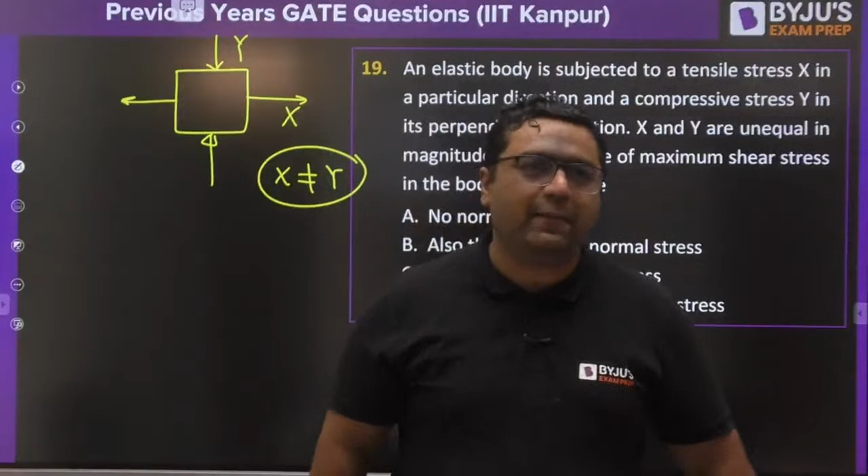So guys, if you are going to plot this, when we are talking about the X face, on X face, X comma 0 is the state of stress. On Y face, minus Y comma 0 is the stress. Let us assume X is more than Y. If you go for Mohr circle, X comma 0 will lie here, minus Y comma 0 will lie here. This will be A, this will be B. You will join AB, center will be C. Taking AB as diameter, C as center, a circle will be plotted. From C, parallel to the y-axis plane will give you the plane of maximum shear. At this plane of maximum shear, sigma star will be normal stress and tau max will be shear stress.

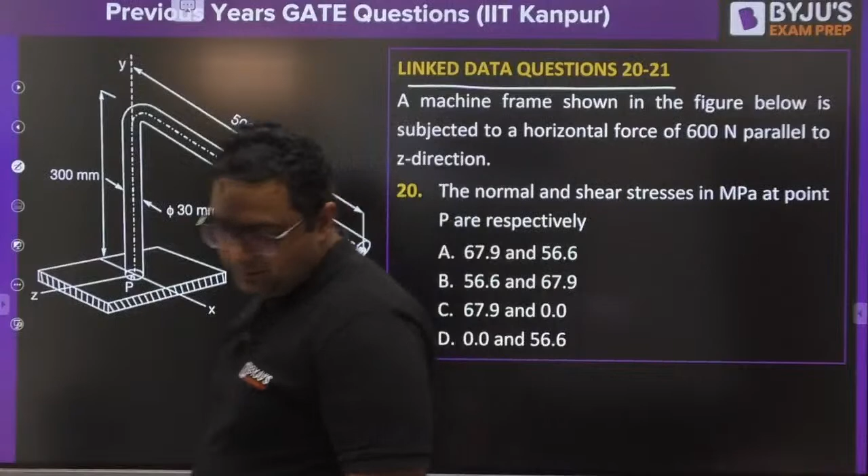Yes, in this they are asking about bending, shear, everything. In the second part, the question is also very interesting. So there are two questions from the same data - question number 20 and 21. And I feel after this we will be entering into columns, then after columns we will enter into engineering mechanics.

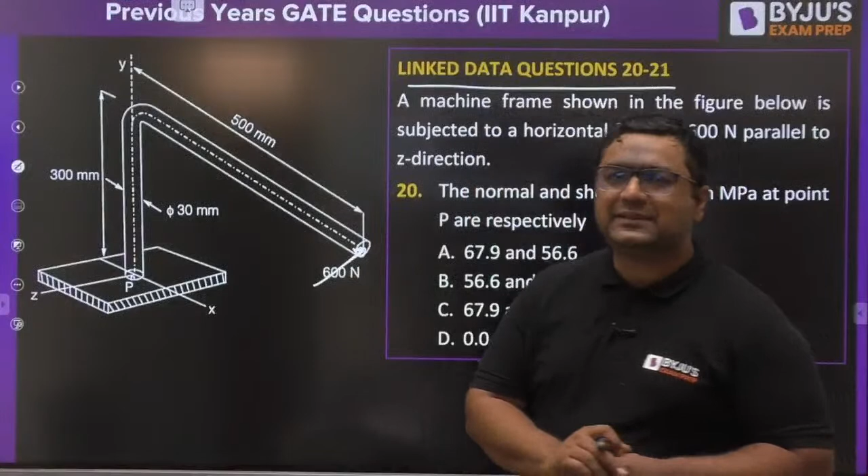Kenil is saying A. Sagnik is saying A. So you guys are saying 67 and 56.

Very good. So guys, if you see this load, you want to find out the effect at P. If you see this force, to see the equivalent effect, I will apply two forces equal and opposite here. This and this will make a couple, and that couple will be the twisting couple. So if we are going to see this part, I am making it separately. It is subjected to a shear force which is 600 Newton, and it is subjected to a twisting couple equals to 600 into 500. So 600 Newton into 0.5. Now you need to see the effect at the outer fiber of P. So this 600 Newton will be creating bending, and this is already creating twisting.

So we will be applying the formula. First of all, bending stress will be 32M by pi d cube. Bending moment M will be 600 into this distance, which is 300 mm, so it is 600 Newton into 0.3 meter. Similarly, I will find tau s as 16t by pi d cube, and t is already given as 600 into 0.5. Solving this, I will get the value of bending stress and shear stress. So bending stress would come out to be equal to 67.9 and 56.6 - this is the answer.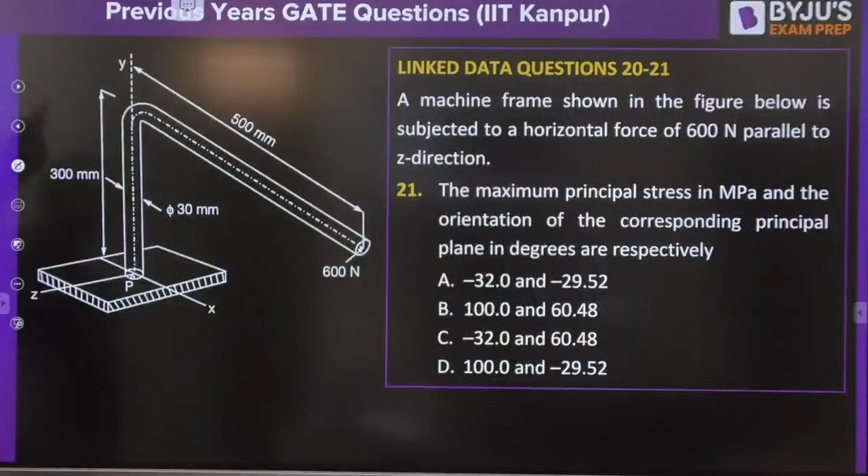For the same question, they are also asking the maximum principal stress and its location. The state of stress is known to us: this is sigma bending, this is shear. So sigma xx is sigma b, tau xy is tau s, and sigma yy is 0. Is it coming out to be 0? Yes.

So you need to find out sigma 1 and sigma 2. The formula is known to everyone: sigma xx plus yy by 2, plus or minus square root of sigma xx minus sigma yy by 2 whole square plus tau xy whole square. You need to find out the maximum value. Now what is the answer? Tell me guys, then we will move to the next question.

Next question is from thin cylinder and sphere. Two more questions from thin cylinder and sphere. Then columns will come, okay.

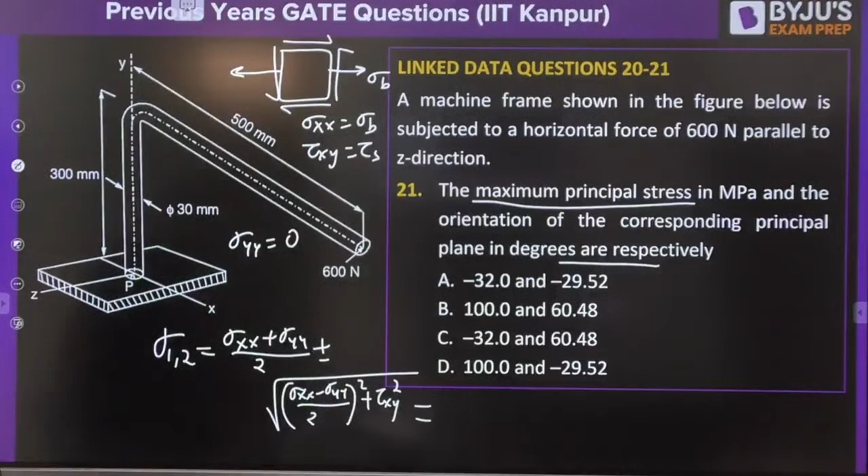So please tell me guys, please tell me. Sagnik, okay, Kenil is saying B is the answer. So I will say yes Kenil, you are correct, B is correct.

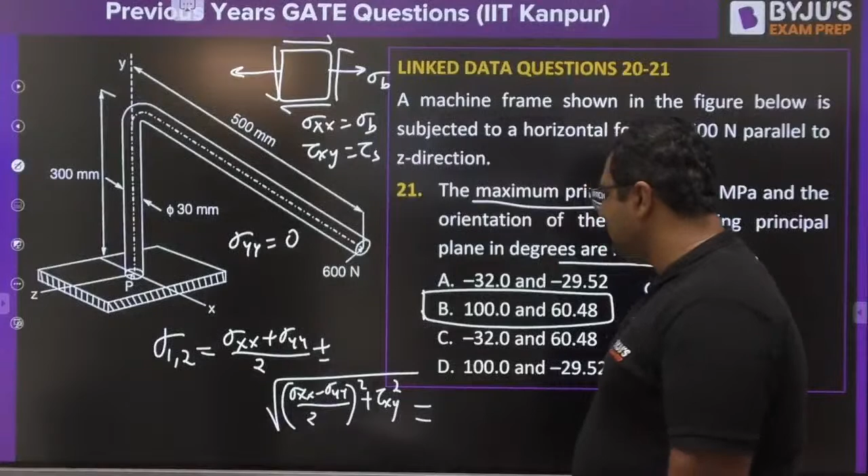So you will be finding out sigma 1 will be coming out to be 100 and sigma 2 will be coming out to be around minus 32. So this will be sigma 1 and sigma 2, so maximum is going to be 100 only. And you know the formula for tangent of theta for location: tangent of theta P is 2 times tau xy divided by sigma xx minus sigma yy. This will give you the value of theta also, and you will get B as the answer, guys.

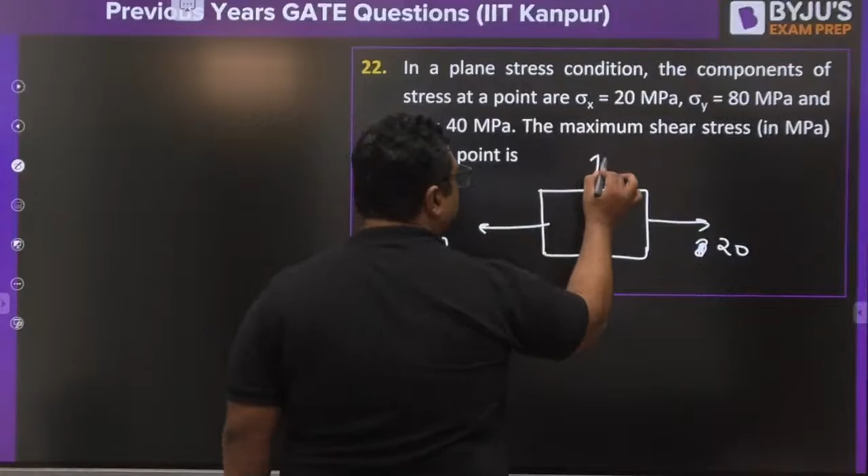Very good Tanu, let us move to the next question. Now we are entering into thin pressure vessels. Still this is from principal stresses only. You can see this is a very easy question. They have given you the state of stress, they are asking for maximum shear stress. They are saying this to be 20, and they are saying this to be 80, and they are saying shear to be 40. You need to just apply the formula, my dear.

You know that maximum shear stress is given as square root of xx minus yy by 2 whole square plus tau xy square. So guys, if you see till this number of questions, the maximum questions are there from principal stresses. Maximum questions are from principal stresses, second number is for SFD, BMD plus deflection part, third is for torsion, and fourth is for simple stress and strain.

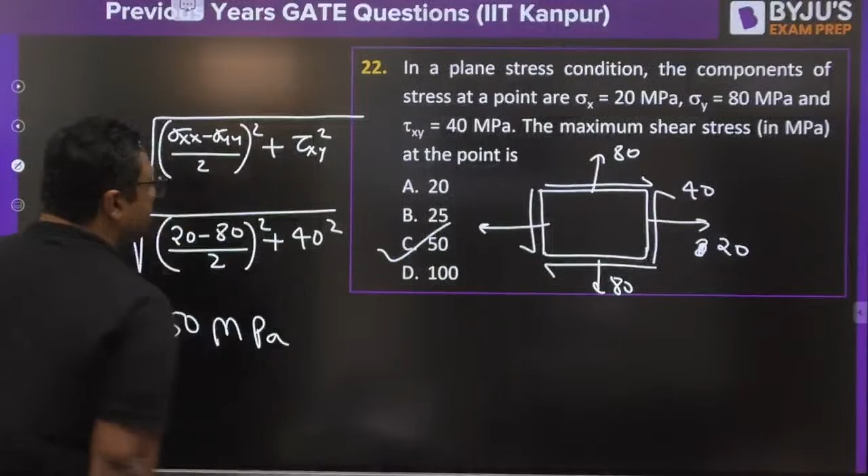Pawan Kalyan is saying C, Tanu is saying C. Pawan, okay, very good, very good, this is a very easy question guys, and sometimes we have seen this type of question also. Very good Sushil, so sigma xx is 20, minus 80 by 2 whole square plus 40 whole square. The answer will be coming out to be 50 MPa, C is going to be the correct answer. Very good, wonderful guys.

This is from thin pressure vessels. A gas is stored in a cylindrical tank of inner radius, wall thickness, the gauge pressure. Yes guys, solve it.

Very good Rishikesh, so you need to find out the answer guys, they are asking you tau max. Okay, first of all I would be telling you that sigma 1 is PR by T, sorry, sigma 1 is PR by T, sigma 2 is PR by 2T. These are the answers, sigma 1 and sigma 2 for the cylinder case. So you know, as it is, sigma 3 is going to be 0. They are asking you maximum shear stress.

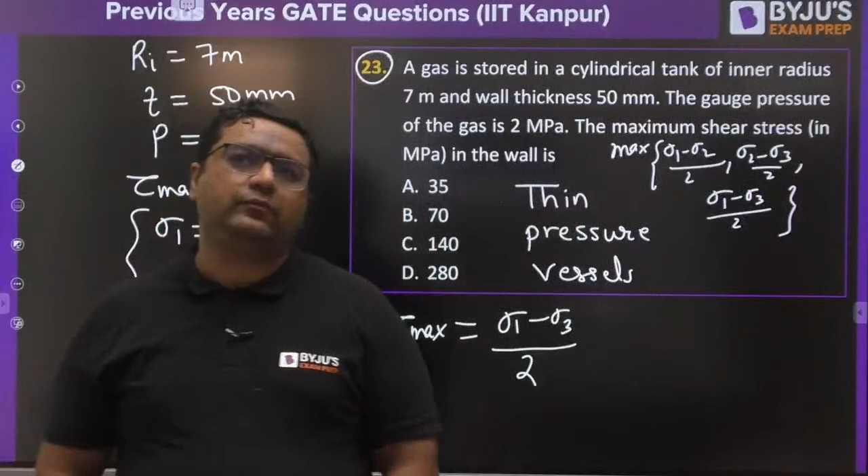Sagnik is saying the answer to be C. Very good, guys. What about others? Tanu is also saying the answer to be C. Yes, so the answer for this will be C only.

So my dear, when you find 1 minus 3 by 2, it comes out to be 1 by 2. And sigma 1 is coming out to be 280 MPa. So the answer is 140.

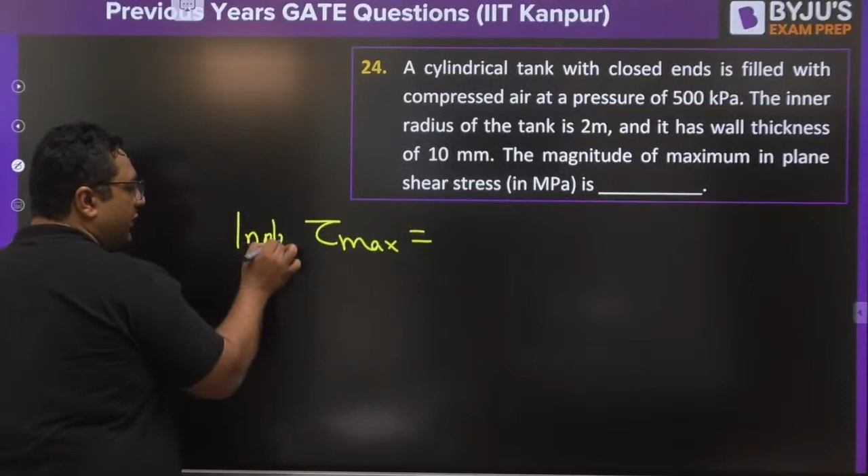Yes guys, the magnitude of maximum in-plane shear stress. This time they are asking maximum in-plane shear stress. So you know the formula for in-plane is sigma 1 minus sigma 2 by 2. Sigma 1 is PR by T, and sigma 2 is PR by 2T, divided by 2. So this comes out to be PR by 4T. So directly calculate PR by 4T, that is going to be your answer.

Solve this guys, I feel after this question we are moving to columns. This is the last question from cylinders, and the 25th question is the last question from the SOM part. Then we will enter some mechanics questions, then once again SOM questions will come. They are from one branch, SOM questions we are about to complete; the second branch questions are still pending.

Anil, very good. I feel you are answering for the previous question. So my dear, with this we have completed all questions of SOM from one branch. I told you we are discussing both mechanical and civil, so one part's SOM questions are over. After this, next question.

Yes yes yes guys, solve this one and get the answer. It is already mentioned that pressure is 500 kilopascal, the radius of the tank, and wall thickness is 10 mm.

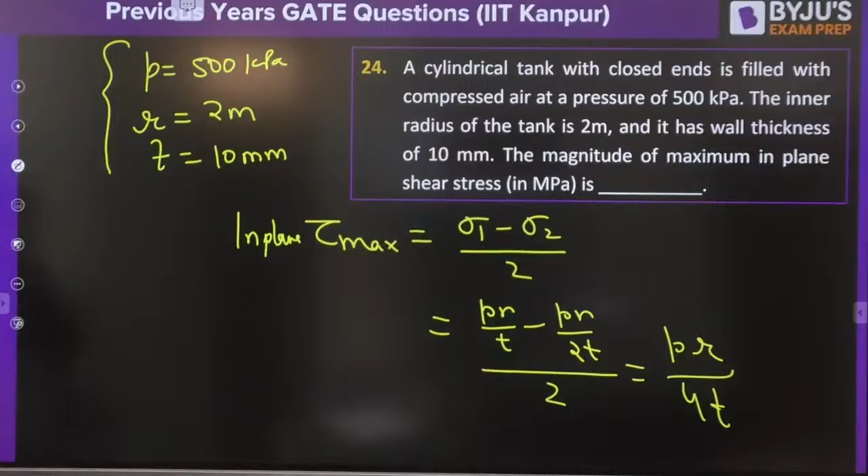Ha bhai King, good afternoon dear. So Tanu is saying 25, Anil is saying 25, Sagnik is saying 25, Teju is saying 25, and the answer for this question is 25.

Last question, guys, from the strength of material part.

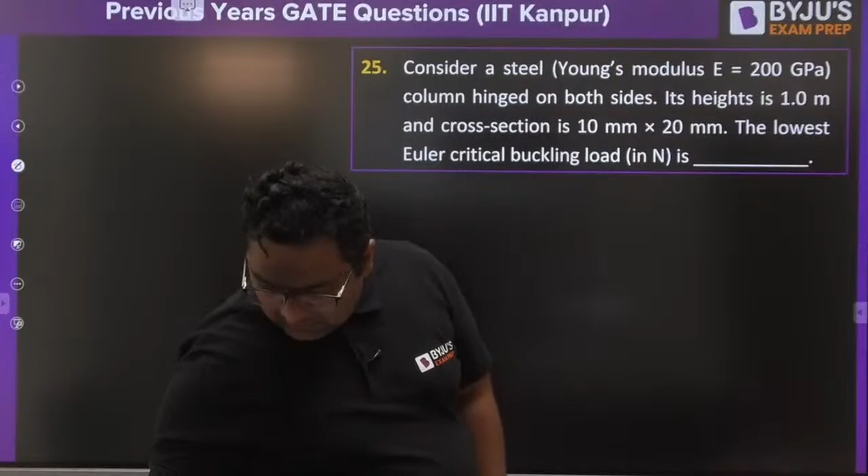Yes, last question, guys, from strength of material.

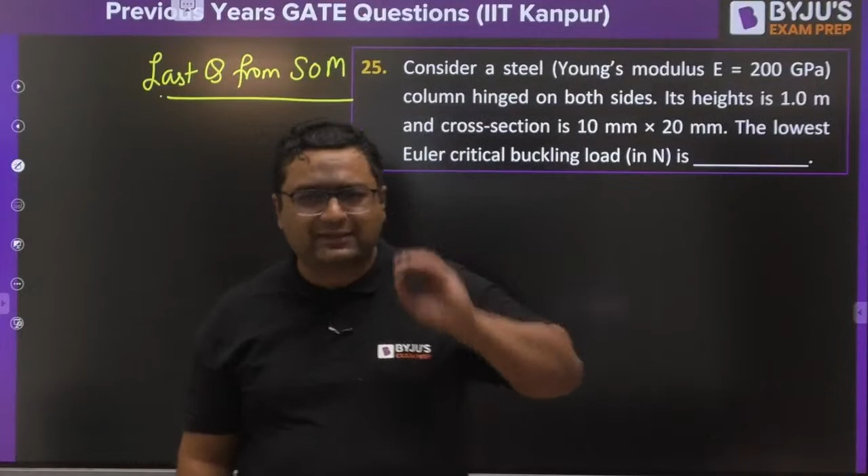So guys, do you want me to continue, or should we have the other branch questions on another day? Because with this, half the session is over. Total 50 questions are there, we have completed 25 here, so the rest 25 are for the second branch. You can see they are interchanged, sometimes civil type questions come in mechanical, sometimes mechanical type questions come in civil, so we must prepare for both. Even I will say you must go for XE questions also, because some XE questions come in civil first, then they come in mechanical, so in that way they get repeated. Sometimes mechanical questions from principal stresses are repeated in civil, then they are repeated in XE. So from all three, similar questions are coming.

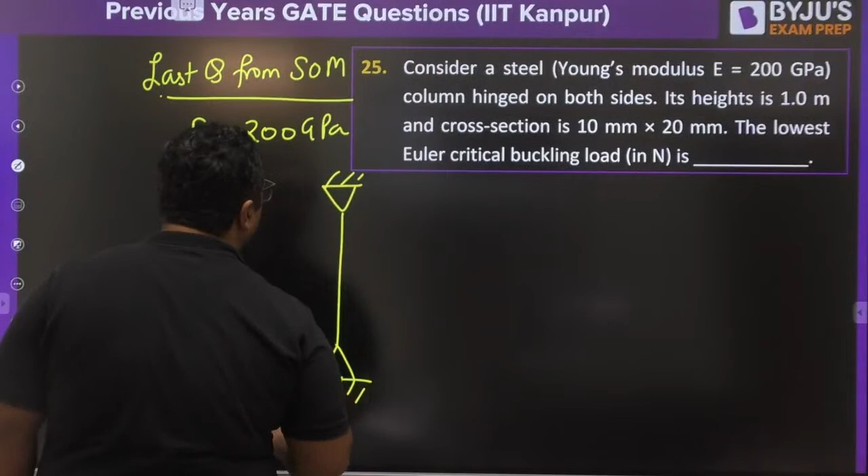Many similar questions. If you see this, consider a steel column, Young's modulus is 200 GPa, column hinged on both sides. This is the column, guys. So for this case, they are saying it is 1 meter in height. Find the lowest Euler critical load.

So when we find out the Euler's critical load, pi square EI minimum by LE square. LE is 1 meter. So you will find PE as 3289.9 Newton. If they ask in Newton, you need to answer 3289.9.

Yes, very good, Sushil.